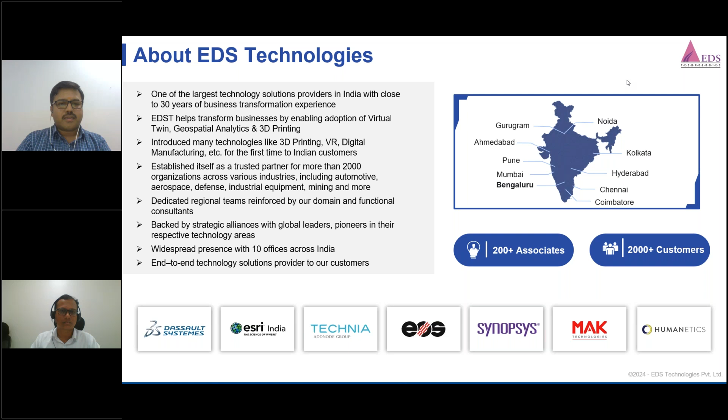EDS provides multiple solutions. Coming to virtual twin solutions from Dassault Systems, it comes with 3D modeling, simulation like analysis, PLM, digital manufacturing solutions, and ergonomic solutions for automotive, aerospace, and industrial vehicles from Humanetics as today's hot topic, which we are presenting, and quality check solutions from Technia, and business consulting solutions for design process, change management, PLM, ERP integration, project management and quality management as well, as we are experts in this domain.

And optical solutions from Synopsys for the automotive industry, functional prototyping and production grade industrial 3D printers for plastic and metal from EOS Germany, electronic design automation validation software solutions from Synopsys, mining solutions from Dassault Systems, GIS geospatial intelligence solutions from ESRI, military simulation and training solutions from MAK, and we also have e-learning solutions developed by our own EDST expertise.

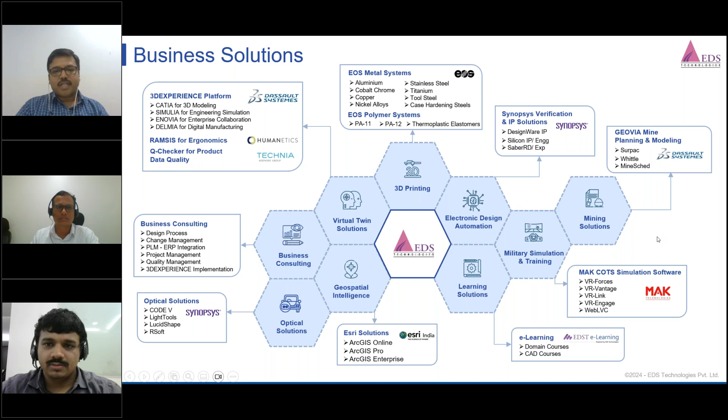Mr. Rajesh Kibile, thanks for joining with us to share your experience in Tata Motors on how our ergonomic solution RAMSIS from Humanetics is very useful and brings value add in the present process within Tata Motors. Mr. Rajesh Kibile has overall 23 years of industry experience with design and development of productivity improvement tools and applications. He is working as senior manager at Tata Motors in the DPDS department for Tata Technologies. Welcome to this session, sir.

Next, we have Mr. Sushil Punaskar, who works as senior solution consultant at EDS Technologies with more than 20 years of industry experience in automotive, with vast domain experience in ergonomics along with prior experience in major Indian and European OEMs. Also, we have Mr. Satyam Pandey joining Sushil to demonstrate a few ergonomic scenarios using RAMSIS software, and he comes with 3 years of specialized experience in ergonomics in automotive.

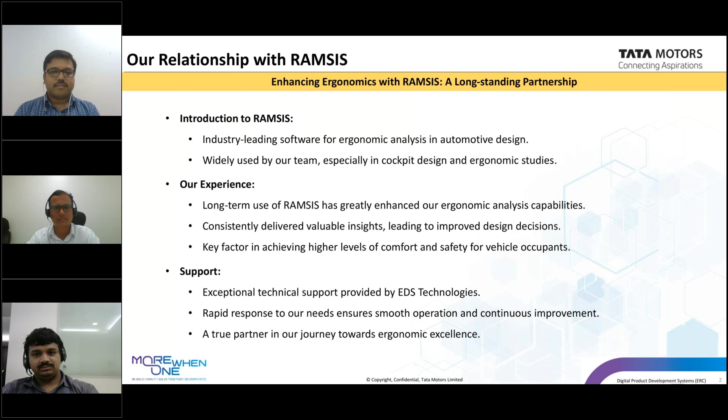Coming to the key features of RAMSIS, RAMSIS has become a vital part of our design process thanks to its powerful features. First and foremost, the software offers a comprehensive library of human models, representing a wide range of body types and demographics. This diversity ensures that our designs are inclusive and meet the needs of various users.

The discomfort analysis feature is another game changer for us. By predicting discomfort levels based on posture and movement, it helps us identify potential ergonomic issues early in the phase of any project.

The simulation capabilities of RAMSIS allow us to visualize human interactions with our designs, validating the choice long before we reach the prototype stage. That means, right from the beginning, our designers start using RAMSIS for different validations, ergonomic validations.

Especially, I would mention the ergonomic analysis modules, which are like reachability study, direct and indirect vision, room and space requirements, belt design, and ingress and egress analysis. These modules are getting used extensively in Tata Motors.

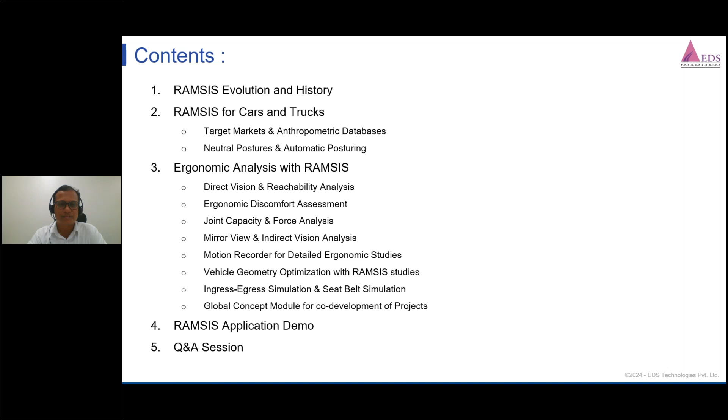Cars were being made before also. However, there were some internal standards, guidelines, and best practices followed in any company that ensured the ergonomic quality of the cars. But the ergonomic quality of the cars was not up to the mark. Then a need was felt globally to make some standards, SAE standards, to harmonize this requirement of having good quality and good ergonomic quality cars.

SAE standards came into the picture around 1960 and became the global benchmark for ergonomic quality. But they were mostly SAE American mannequins, American population based, and mostly 2D standards worked in two dimensions. As in the 1990s a lot of 3D CAD softwares came into picture, like Ideas, CATIA, UGNX, Creo, etc., the need was felt to do ergonomic analysis also in the 3D environment. That gave RAMSIS a kind of kickstart to come into picture and help the automotive industry perform ergonomic simulations right in the 3D digital environment. We see a lot of improvement in the ergonomic quality of cars post introduction of RAMSIS and other similar softwares.

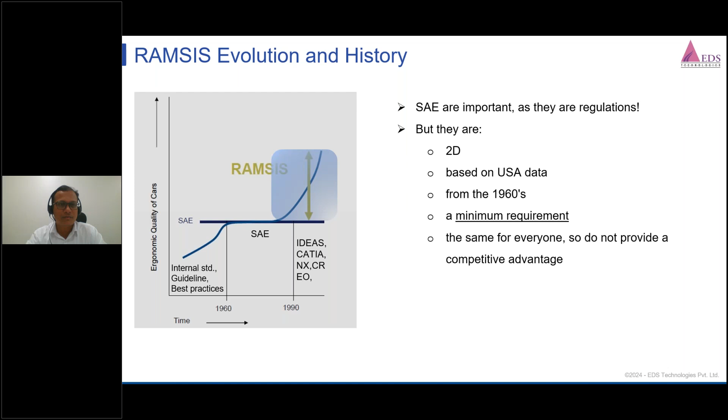Let's start from the basics here. When we launch any new program, we have some overall PAT attributes. In many companies called PDB, product data book, and a few companies call it FOST, functional overall safe standards and targets. For example, there are gap and flush targets, craftsmanship targets, warranted life targets in years and kilometers, NVH targets, stiffness targets, in-cab noise, cabin comfortness and cabin sealing targets, visibility targets. It's a big list. So along with all these PAT targets, performance attribute targets, we also have HMI and ergonomic quality targets on the overall vehicle.

We should employ digital tools and digital techniques to ensure that these targets are met, because unless they are met, we don't really have a competitive edge in the market.

For most of the attributes, we use digital simulation techniques that save our time, cost, and repetitive efforts. Due to simulation techniques, we can adapt to any change easily. Furthermore, design improvements can be made based on feedback from the simulation tools. That is where simulation tools are helpful.

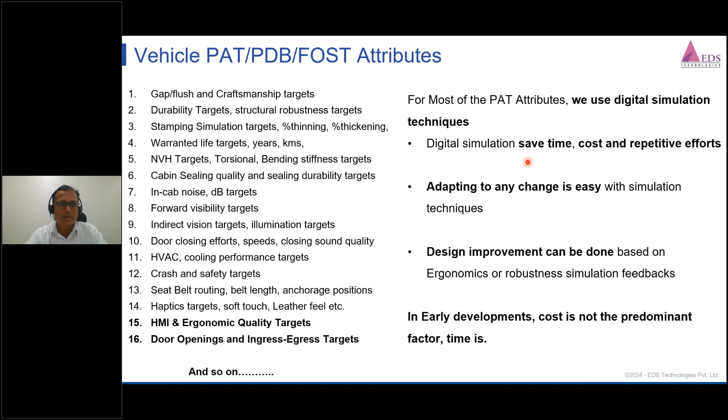In a normal traditional scenario, whenever we prove our architectures, we make some digital bucks and some physical bucks, like a typical seating buck where a range of people, the jury, are going to sit and evaluate interiors and roominess. So it's a downtime of a lot of engineers going forward who take out their working time to visit this facility and give feedback, which ranges hours and hours.

So it's definitely a downtime of many engineers, a wastage of man hours. Ratings from these physical prototypes are always susceptible to sentiment-based decisions, which is not good.

It takes a lot of cost and time to order these bucks, and making bucks also takes time. Logistics is also one of the challenges. It needs time for the physical assessment. The actual assessment needs quite a lot of time to analyze the data, collection of data from the jury subjects, and presenting this data to higher management is really challenging, because we have to make some analysis on that. It's all time-taking activity which consumes early time.

Analysis can't be presented confidently, because there can be some hindrance in the motion. When the manikin moves, there can be hindrances that cannot be analyzed in a static way. So we cannot present the data as a kind of movie file or simulation file.

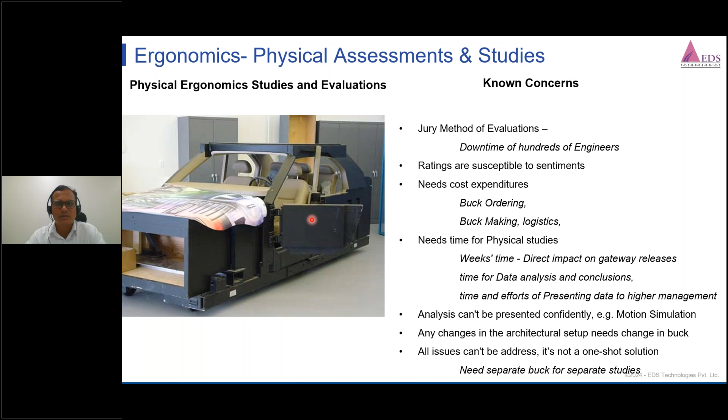RAMSIS is the most comprehensive ergonomic simulation software for the transportation and mobility industry, with the largest anthropometric database worldwide, ranging from Indian to American, German, Korean — all types of databases are available.

It has automatic posturing capability, a standout feature of RAMSIS that gives a lot of confidence to the packaging engineer and ergonomic engineer. It has multiple readily deployable neutral postures, which we'll see in some slides ahead. The largest population ranges, like old, mid-age, young, and even child populations, can be deployed in the cabin space.

Then you can evaluate and analyze discomfort levels. As Mr. Rajesh said, discomfort analysis is one of the best features of RAMSIS.

RAMSIS has a deep collaboration with the global automotive industry. They walk along with the industry, feel their needs, and provide solutions to them.

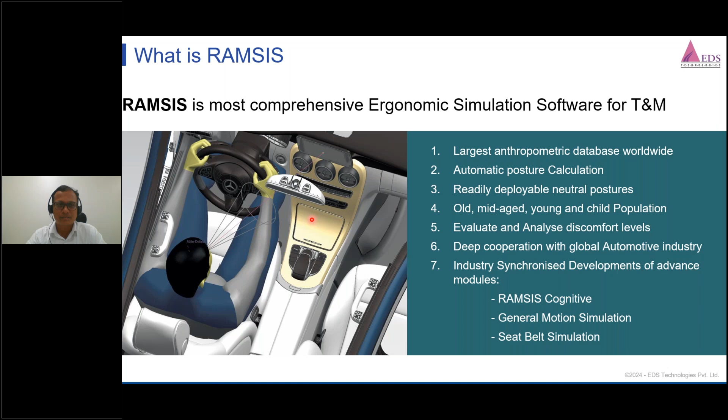RAMSIS has industry-wide, industry-synchronized development of advanced modules. For example, cognitive is one module. RAMSIS general motion simulation is another module, very latest, launched this year around April or May, which caters specifically to ingress-egress simulation for trucks and cars. And then we have a very proven seatbelt simulation. So that was all about RAMSIS in a nutshell.

Before we start any study in RAMSIS, we have to look at our customers and who are going to drive our cars, in a single country or maybe multiple countries. RAMSIS has many different anthropometric databases with corpulence adjustments like hip size and waist size.

It has different age groups. 18 to 70 is the overall generic age group, covering younger to very old people who can drive MPVs, station wagons, and trucks. 18 to 29 is a relatively younger population that can drive bikes, scooters, and SUVs. 30 to 49 is a mixed mid-age population which can drive sedans, crossovers, and trucks. And 50 to 70 can look for hatchbacks. So we have different age groups for different types of transportation domain vehicles.

Reference year is something where you can choose any future population and use them for your studies. For example, the Size India database is valid up to 2040. So if you want to start your studies and launch your vehicle maybe 3 years down the line, you can consume the 2028 or 2027 anthropometric mannequins and start your studies accordingly, because year over year and decade by decade the population size grows, making sizing more important.

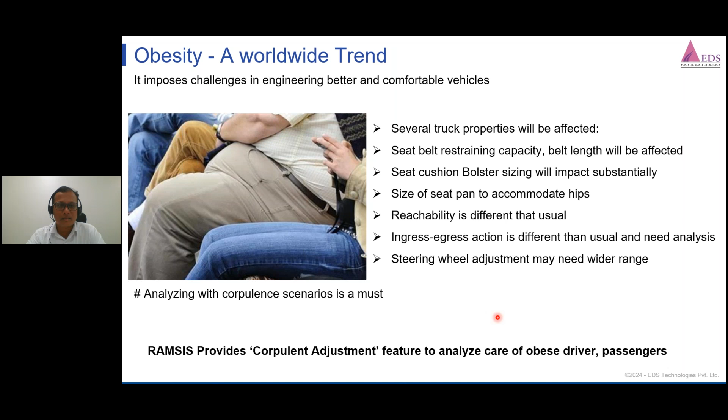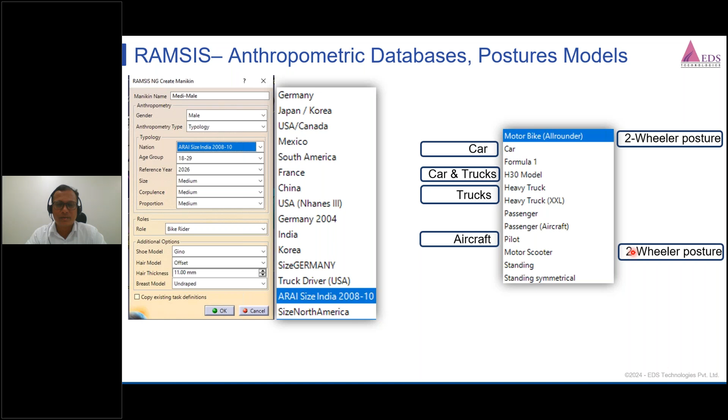Apart from databases, RAMSIS also has neutral postures - ready postures available to choose from. For example, there's a car posture typical to simulate car scenarios, a truck posture exclusively, an aircraft pilot posture, and some two-wheeler postures like motorbike and motor scooter, suitable for the two-wheeler industry. You can make use of them for your studies and assessments.

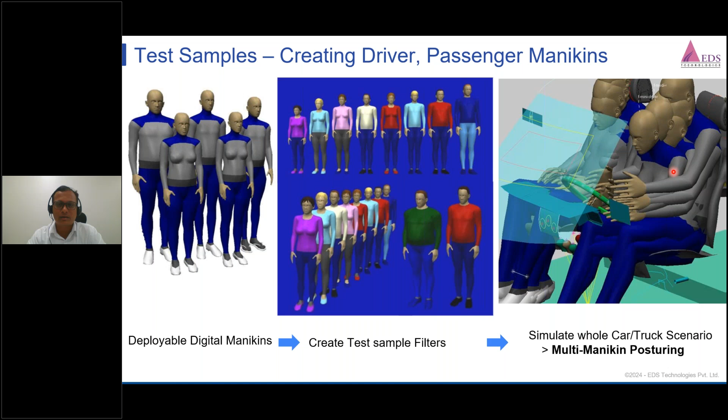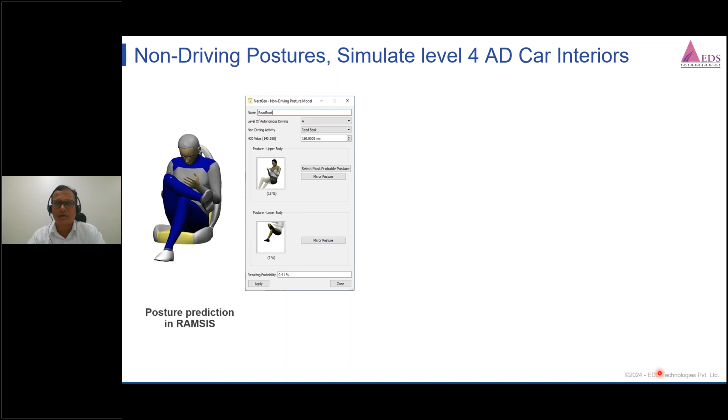Apart from driving and posture, there are a lot of non-driving postures also, especially for level 4 autonomy cars, where there will be steering, but you have the option of not maneuvering it. In that scenario, how the interiors of the cars will be is really a matter of great choice, but you can choose what the drivers and passengers will be doing. So a typical level 4 autonomous car driver may go for newspaper reading, or maybe a laptop. These ready-made postures are available, so you can simulate level 4 autonomous car interiors with the help of these non-driver postures.

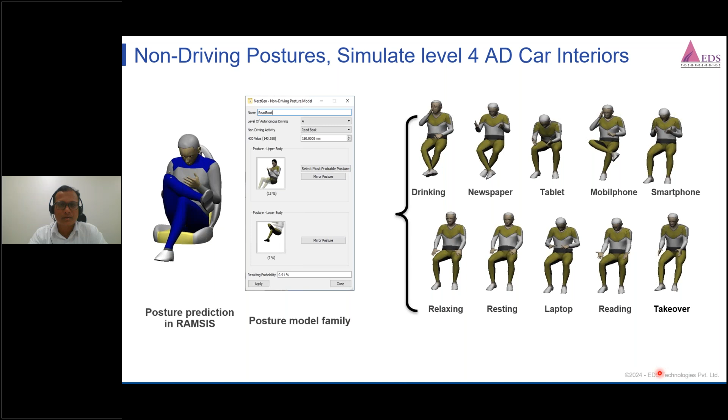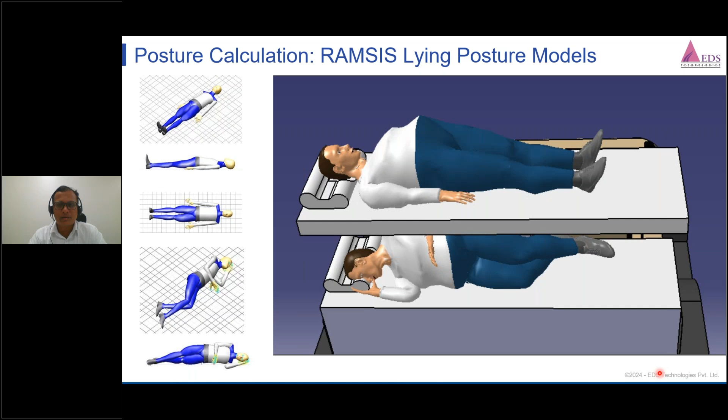As I said in the title page, we have a RAMSIS automatic posturing capability. Whenever we call upon any new manikin in the RAMSIS environment, it comes as a standing tall manikin. But as we give it a lot of constraints, like task assignments, it takes a definite posture.

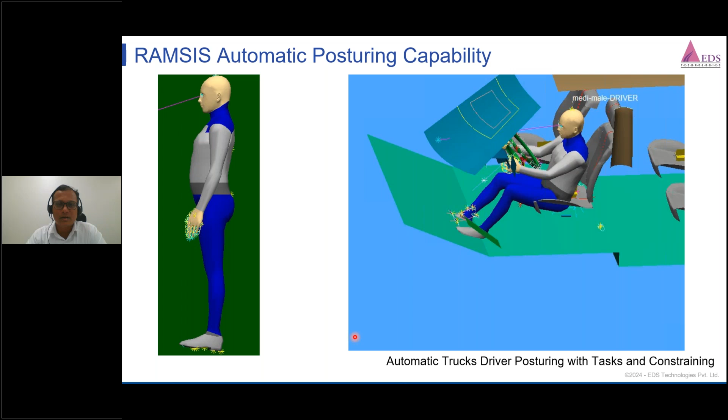Now see, the mannequin is given some assignments, and it's getting into the comfortable position, and then it moved to the desired position automatically. It's just a click of some minutes. Otherwise, in other software, it takes maybe hours and days to position that mannequin correctly in the space. That is actually a very standard feature of RAMSIS, the manikin automatic posturing capability.

I think with this we'll start on what things you can do with RAMSIS analysis. What are the typical scenarios you can use RAMSIS for, or look forward to RAMSIS helping you in your analysis. So now I have put two vis-a-vis scenarios, maybe a car and a truck scenario.

At the top left, the driver is trying to open a glove box, pushing it to open it, so reachability analysis can be done properly. Door pull capability is really important, especially for shorter females, where reachability is really a challenge for them. So all this can be analyzed properly.

Similarly for the truck industry, where the door sizes are very big, this can also be analyzed. It gives ready-made hand-reach zones, as you see in yellow, so that you can package your cabin interiors and controls and displays accordingly in this zone.

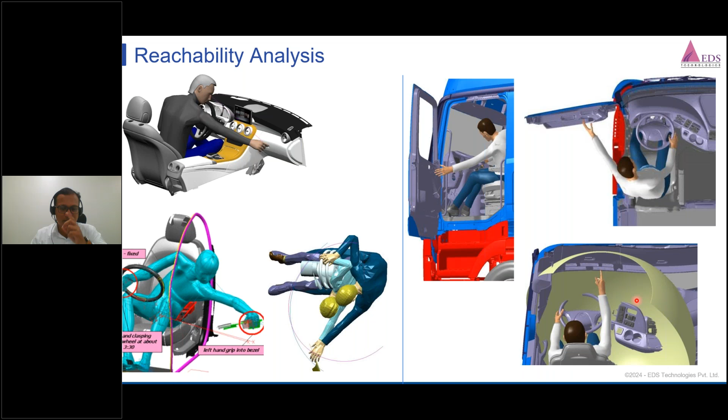Indirect vision, which is very important from the safety point of view, as they are regulated by amendment laws. You have ORVM visibility, which can be readily simulated in RAMSIS, and you can really post it on the glass of the mirror, so that you see what view you can realistically see on the mirror. That also can be simulated in RAMSIS.

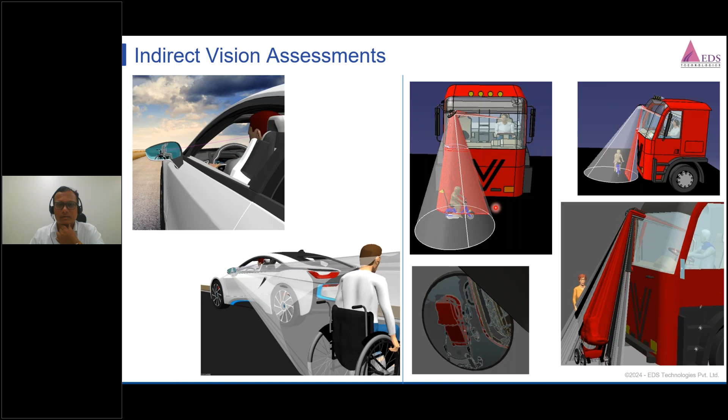For the truck industry, it is more challenging because of the size of the vehicle, and there are certain scenarios like a child traveling in front where the driver may not be able to see properly. So you can use these studies to determine where to place the proximity mirrors, etc., to view the pedestrians properly.

Discomfort assessment is again one of the best features of RAMSIS. When the RAMSIS mannequin takes a seated position, it produces a spider chart listing all the major joints in the body, with a scaling factor showing greenish and reddish parameters.

Neutral posture gives the best comfortable position. However, when the mannequin performs activities like steering or holding, each parameter along that chain of limbs tends to increase stress and discomfort level. You can analyze such situations with this discomfort analysis, which isn't part of any competitor software, but in RAMSIS you can do it confidently, with very good correlation to physical test results.

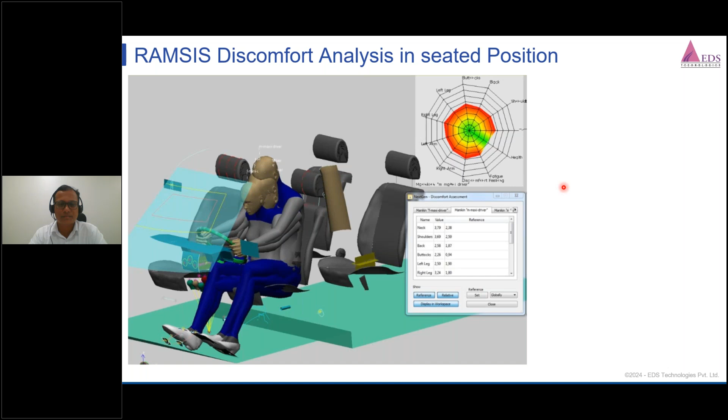Joint capacity analysis is another inbuilt feature of RAMSIS, where you can analyze joint capacity when performing actions or activities inside the cabin. For example, here I'm assessing leg joint capacity, specifically the hip joint and knee joint. As I see, it shows these hip and knee joints are highly stressed, meaning all of their joint capacity has been utilized.

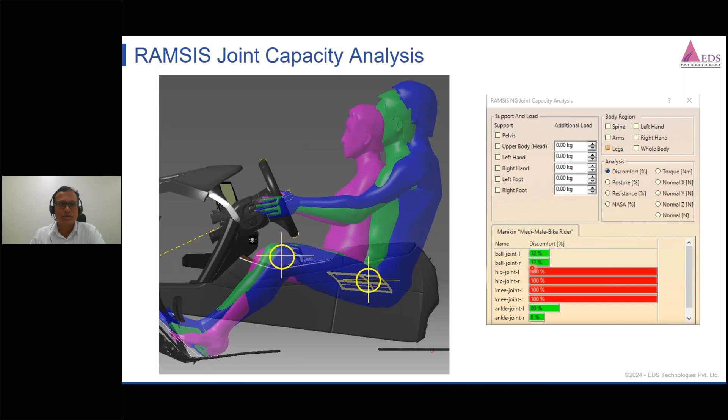As an ergonomic engineer, we have to analyze what is causing these joints to go into a completely cramped situation, and what the driving factor is. If we improve that, these joint capacities will improve, dropping below 90 or below 70, becoming greenish or yellowish, meaning stress and discomfort has been relieved from the hip and knee joints.

RAMSIS gives an excellent feature called force analysis, providing three types of forces: passive force, active force, and reaction force. For example, if I press a pedal or lever, this whole anthropometric chain gets activated, so the force application is actually a resultant force of this whole chain. It gives a passive force applied here, and an active force solely applied by the mannequin.

It also takes the support force in the seated position, called the reaction force. So it gives three force levels in total.

In this position, you can also do a reachability analysis. This becomes a comprehensive ergonomic study in just one set, allowing you to analyze whether the door opening angle is too much, or where the door handle should be placed for a comfortable position. That can be studied and analyzed properly.

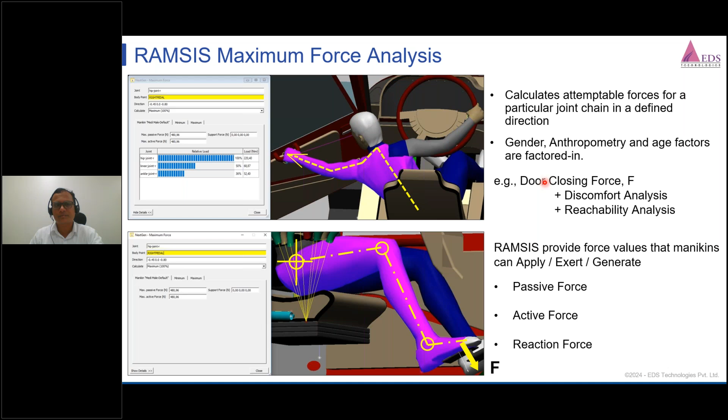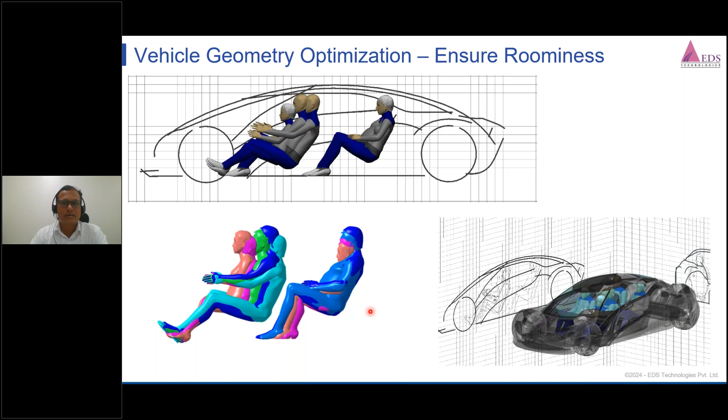For headroom, there's an SAE standard for headroom calculations - I don't recall the exact number, but it's a separate standard. With RAMSIS mannequins digitally involved in the studies, you can calculate realistic headrooms. The tallest one shall have clear headroom, and this can be analyzed directly so you don't depend on any standard. You can very confidently declare your headroom clearances.

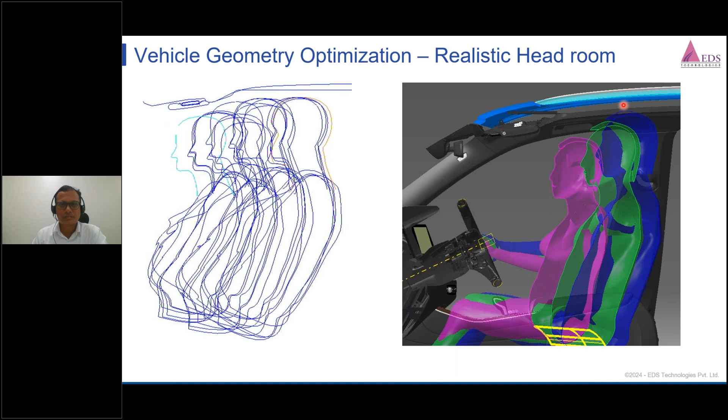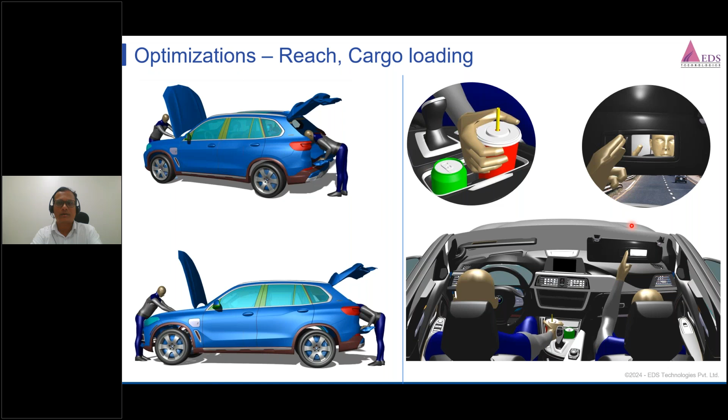This year, RAMSIS has come out with a new add-on module called RAMSIS General Motion Simulation, which can simulate truck and car ingress egress. Ingress egress is quite a tricky phenomenon as it depends on a lot of factors, requiring a lot of know-how and knowledge to decide door openings etc. RAMSIS provides a clear and comfortable method of evaluating ingress egress in both trucks and cars.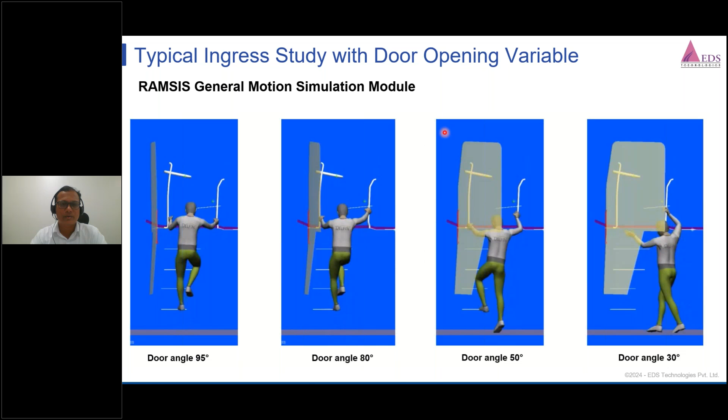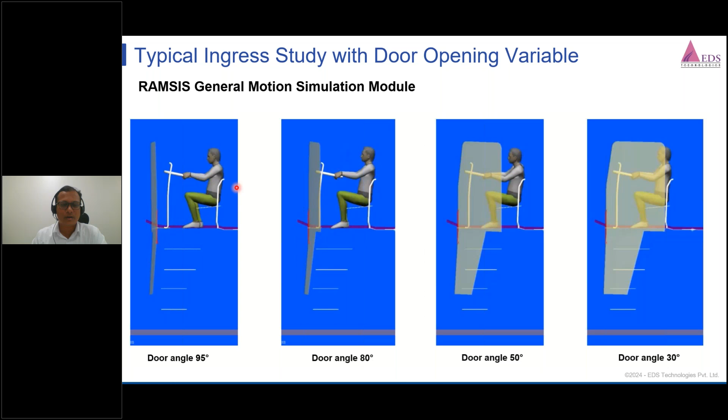There are four different door angles for a typical truck, and you can see how the mannequin has taken the proper shapes and path to reach the seated position. So you can analyze this comfortably in RAMSIS.

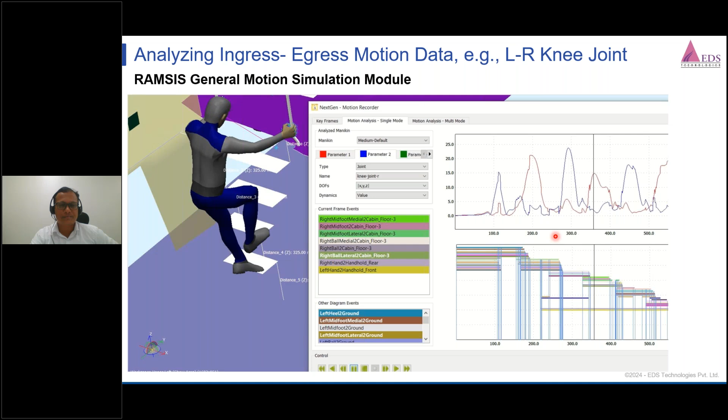Similarly, this General Motion Simulation is used for the car industry also, specialized for car industry. The mannequin will take a seated position here. Okay, I think the video did not play correctly.

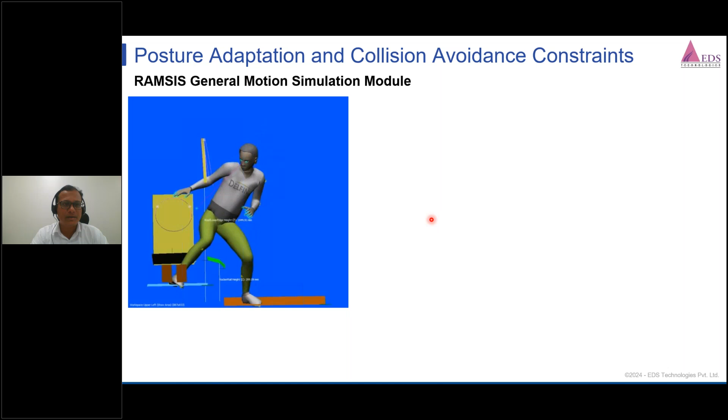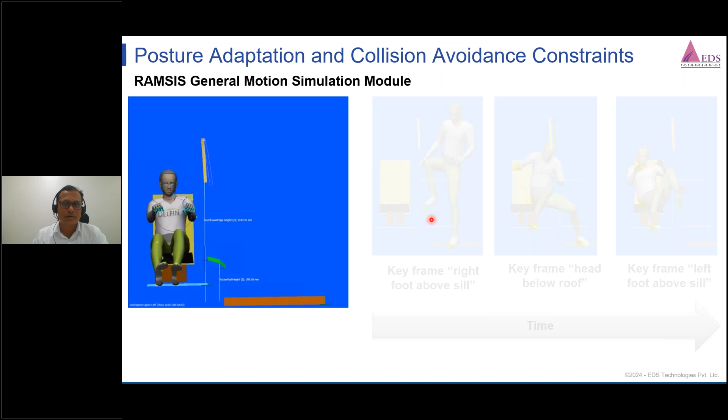It has some strategies built in, so if you see how realistic the simulation is, it doesn't feel any different than what we humans do in our ingress actions - it's quite similar to that. And that's where RAMSIS stands quite far apart from the competition. You can analyze how it works on the collision avoidance strategy - whatever hardware you give it, it tries to maintain a minimum gap while performing the actions. That kind of intelligence is built into RAMSIS software, which I don't think is in any other software.

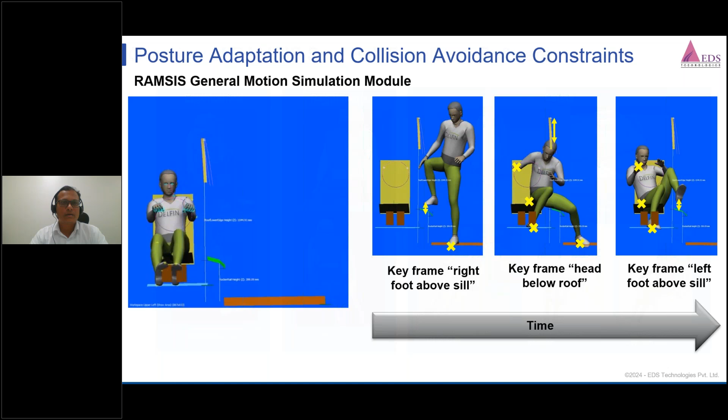Apart from RAMSIS, other app capabilities, the RAMSIS seatbelt simulation software is a very important one. It has comprehensive capabilities altogether. For example, you can populate your RAMSIS digital mannequins and perform seatbelt routing generation, digitally generating the seatbelt routing on male-female populations and calculating important things like neck cutting and seatbelt length evaluations, or maybe the anchorage position also.

Apart from general ergonomics, you can also use it for regulation purposes, like employing the EBTD, electronic belt fit test device. You can route your belt on that test device also and evaluate it.

Not again for regulation, but for safety reasons also, there are some readily deployable pre-crash test dummies like the hybrid ATD dummy, hybrid 3 dummy, the Thor dummy, and also the child Q dummy, readily available, which you can deploy digitally in the RAMSIS environment. You can do the seatbelt routing on it and see how the belt is routing over the chest sensors, etc., and evaluate properly.

And you can also use that for the child dummies here. You can go for that belt routing also on that.

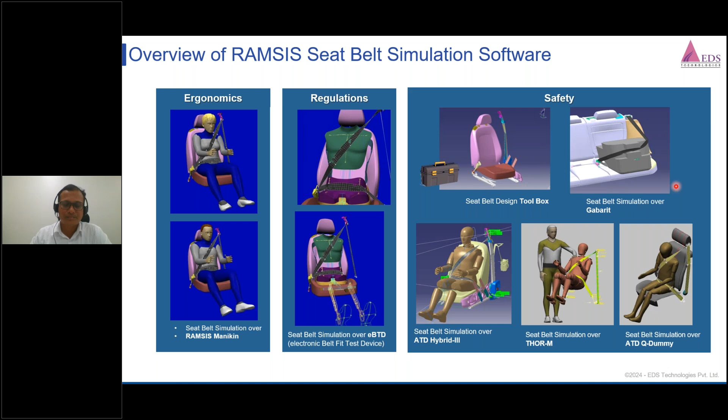So there is some technical solution that should be provided to counter this situation. Maybe we should move the anchorage on top side, or some other alternative can be worked upon, provided we know this issue. Otherwise, we come to know this issue very late in the program, or maybe when the vehicle is launched on the roads. At that time, there are field complaints about such neck cutting issues. But RAMSIS provides you the opportunity in the digital itself to understand these concerns, identify, analyze, and improve upon it.

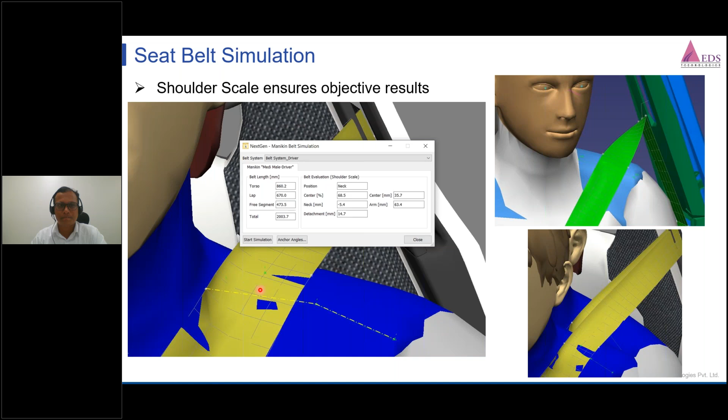RAMSIS has a seatbelt design toolbox feature, where in the second row you can do a lot of things like unbelted seat, unbelted position of the belt, how it looks, how the position will be, and whether it's fouling or clashing with any hardware. That can also be simulated in this RAMSIS toolbox.

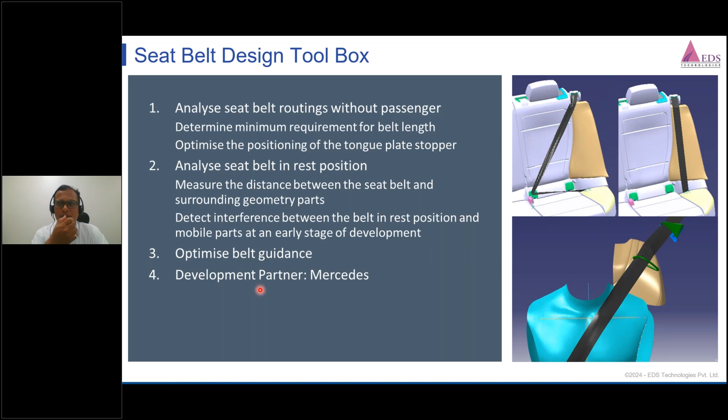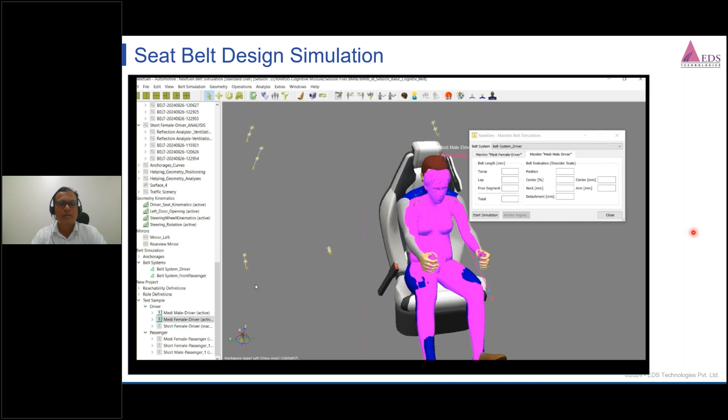I will show a typical scenario, very quick information about seatbelt simulation. I'll just play it for you. You'll see how quickly the belt can be generated and routed over the mannequins, and you can understand the belt length, how much of the belt is passing over the torso, and how much percentage of the belt is passing over the lap region. Everything can be known properly, and of course the total belt length can also be known very effectively.

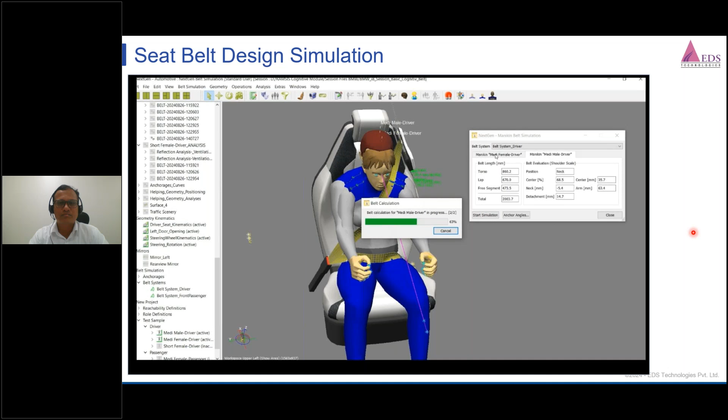Yeah, so this is generated. There are some parameters like torso and lap - these are the effective belt lengths on those regions. This can be simulated very fast, and the moment you change the mannequin, it will adjust - now it's a female dummy, it will adjust to that. So it's best in class simulation, I will say, to properly simulate our seatbelt routings.

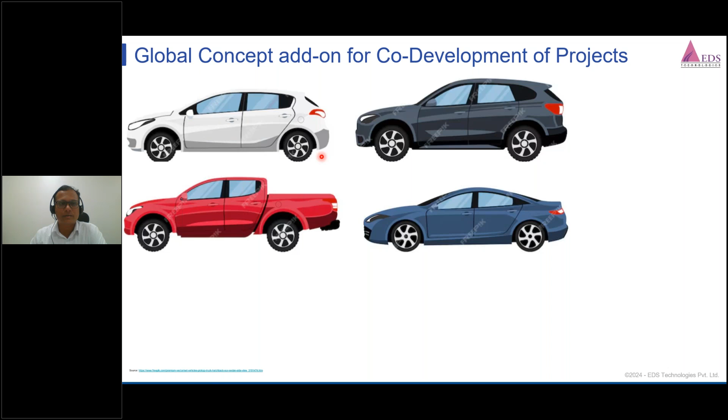Now, the development of these programs can be at a similar place, and it can be developed at different locations also. So it typically imposes some challenges to co-develop these projects, because the seating location, the seating position, or the aesthetic dimension of these cars are typically different. For example, a hatchback will have a lower seating posture, seating H30 dimension, and the SUV will have the tallest one. So there are some challenges around it.

So with any basic RAMSIS license, one car posture model comes as default, which caters to a range of 240 to 280 millimeters, a typical hatch and sedan H30 dimension. And it comes with a basic anthropometric database of customer choice.

Now, the customer has to specify which database he wants to go with. This H30 dimension just caters to 240 to 280. But what if I have to develop other products on the same platform? I have to take care of those needs also. For example, the pickup H30 dimension can be around 350, 370, or maybe even 390. So this posture model won't be of any use because it just caters to these ranges.

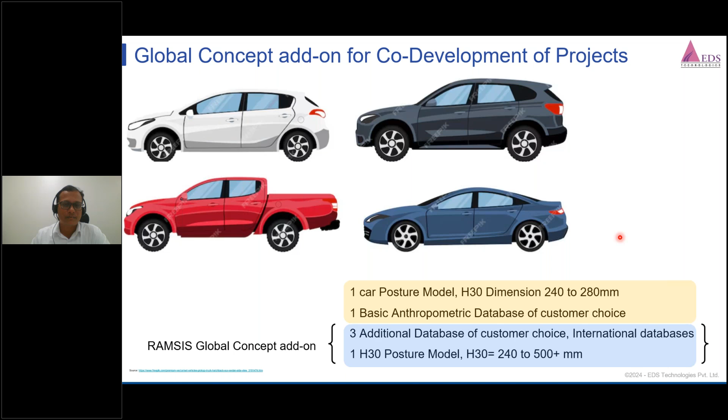To counter that, Humanetics has come out with a technique called global concept, which gives you 3 additional databases besides the first one, completely depending on customer choice. It can be an international database also, like Germany, American, Korean, or Chinese. Along with that, it gives the H30 posture model, totally different from the first one, with which you can simulate H30 dimensions from 240 to more than 500 millimeters. So that caters to your range of SUVs and pickup vans.

There are some customers globally and also in India who use this global concept model, because they are typically SUV makers in India who have had this RAMSIS global concept for decades. This is a very different feature, especially as many companies are now moving toward platform developments and scalable products in X and Y directions. So this global concept can be of great use to confidently do your ergonomic simulations for all those different types of seating positions.

I think that was it from my side. And yes, you can definitely cater to this range of products with the help of this global concept.

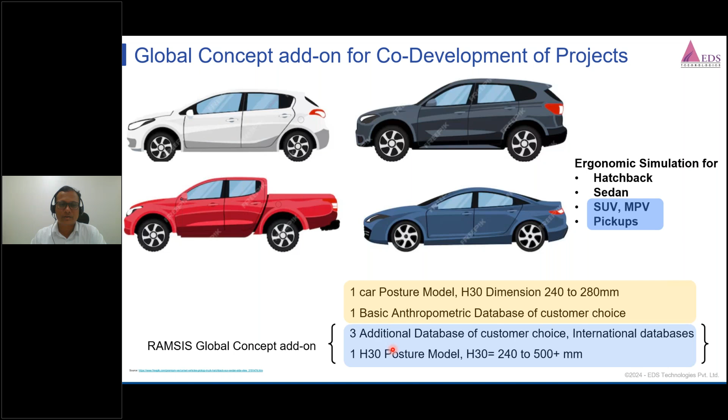RAMSIS, as I said, is a global product. It's world known and a proven product in automotive. Most automotive companies use it for their day-in, day-out ergonomic analysis. It has a presence in the bus and truck industry, two-wheeler industry, industrial vehicle industry, and also in the aviation industry. So it has a global reach, global presence, and they work with the customer, feel their needs, and provide solutions to them.

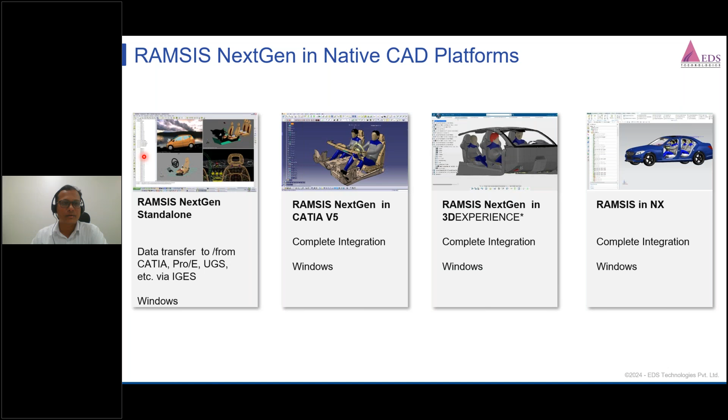RAMSIS is available in 4 native platforms. First is the standalone one, which has a dedicated user interface. It is the most stable, as it's the core product of RAMSIS. Then there are integration products like CATIA V5 integrated RAMSIS, 3D Experience, and NX integration RAMSIS. Technically, capability-wise, there is no difference; it's just a matter of the customer's choice, since they have native CAD platforms with them. However, there is always the possibility of having a standalone with a dedicated graphics interface.

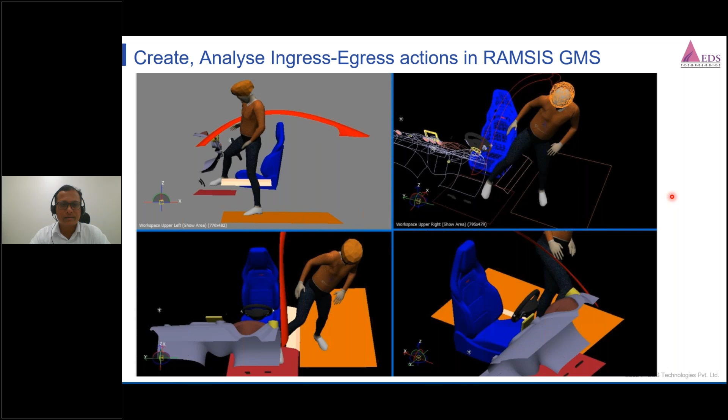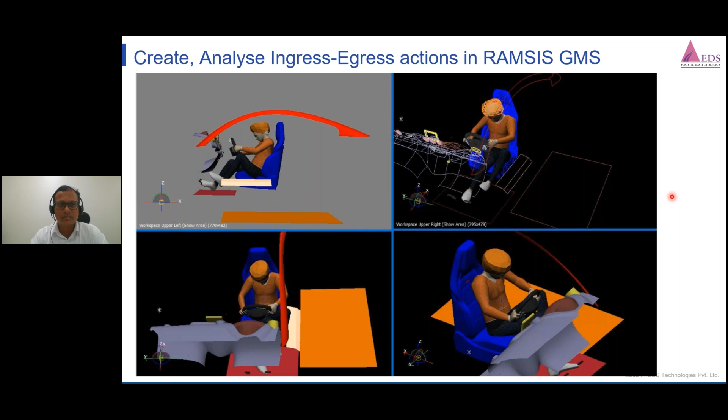While the mannequin is performing the ingress simulation, you can watch his joint angles change, and see the typical key frame or motion frame. There is a very awkward position of the mannequin at one point. That awkward position may be due to some hindrance, or maybe due to some other body structure or hardware not being comfortable for him.

So this is a general motion simulation. You can create these motion strategies and ingress strategies, analyze them, and then make design decisions, like if the roof is too short, or the sill height is too tall. You can check all these angles, or even see if the B-pillar is a hindrance to direct entry. All these scenarios can be analyzed.

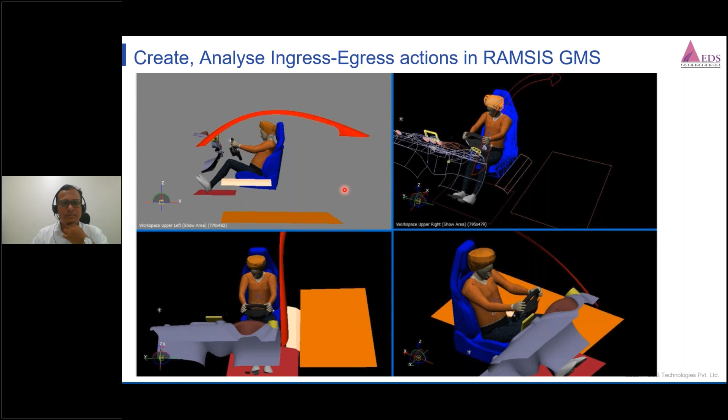I think that was it from our side.

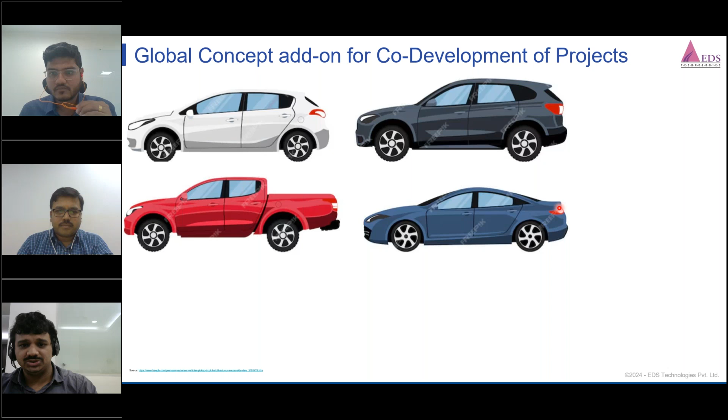I would love for Sushil sir to tell about this. Sushil sir, if we can please go back to the previous slides, there was a slide where we showcased the number of different anthropometrical postures, neutral postures based on the industries. Yeah, let's browse through that one. I think that was an interesting slide. I think it depicts all available postures.

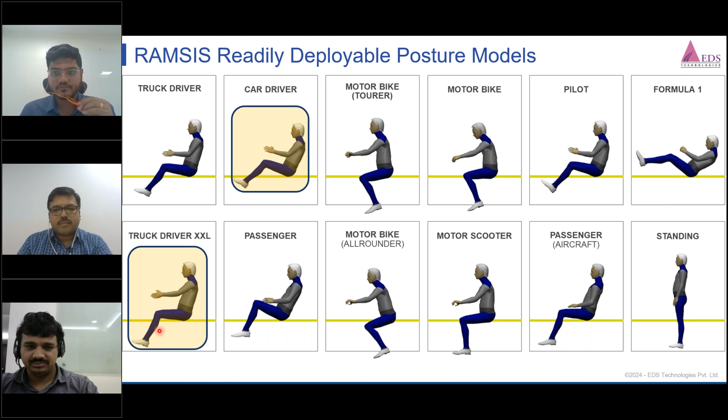So we have one more question. Is RAMSIS suitable for the tractor industry?

Yes, yes, as well. Yes. Okay, why not, Sushil sir? Actually, yes.

Now, very interesting, I like this question actually. We understand that tractors are not meant to be comfortable, but that's a myth now.

So when there are closed cabins, naturally you would have some structure, some interiors, some controls, and that has to be completely analyzed for ergonomics properly. Using RAMSIS in the tractor industry does make sense, and I can name John Deere and some other tractor makers who make use of RAMSIS for years.